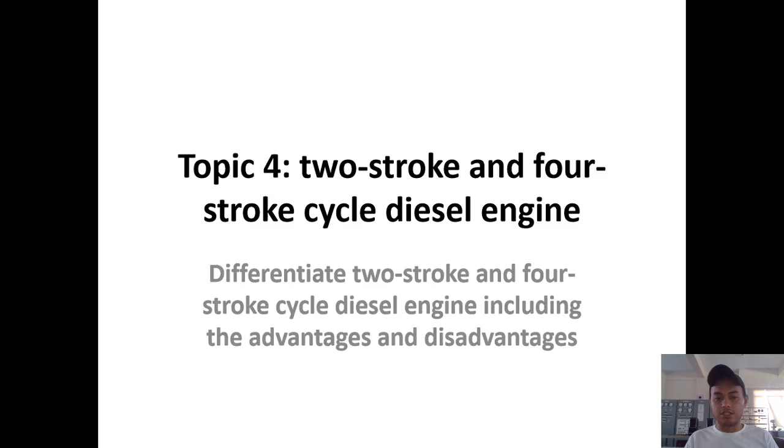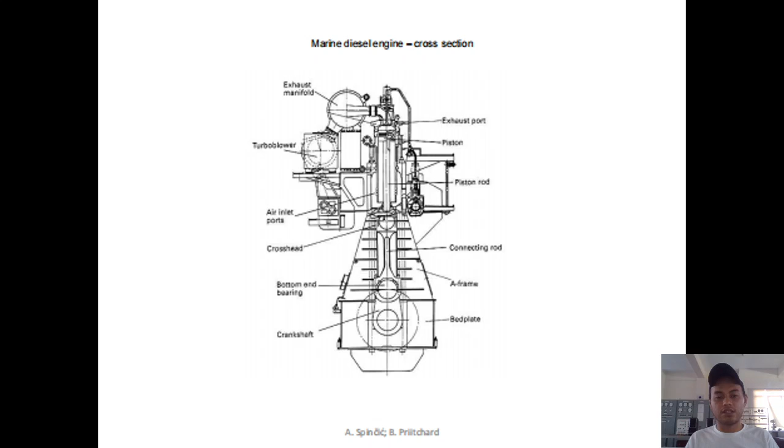Our topic will be all about the four-stroke diesel cycle, the two-stroke diesel cycle, the two-stroke crosshead engine, and the uniflow and loop scavenge engine. We will tackle all of these topics.

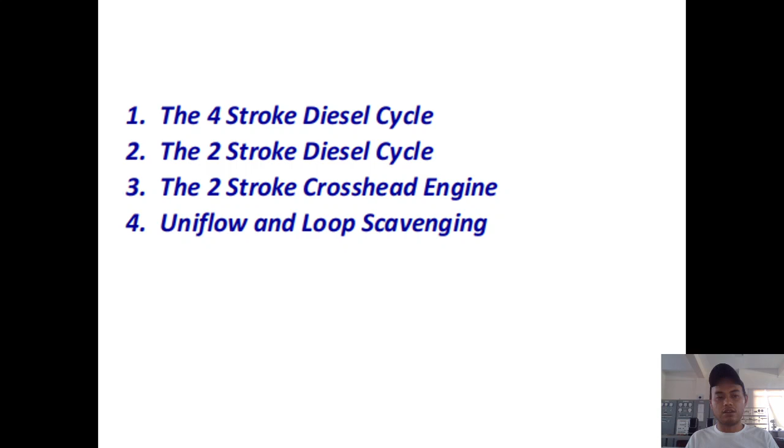Stroke 1 is induction or intake. Intake of air, so the air enters inside our combustion chamber. Inside the combustion chamber, we have a piston.

The crankshaft is rotating. As the crankshaft rotates clockwise, the piston is moving down the cylinder. The inlet valve is open, opening inside the combustion chamber of the cylinder.

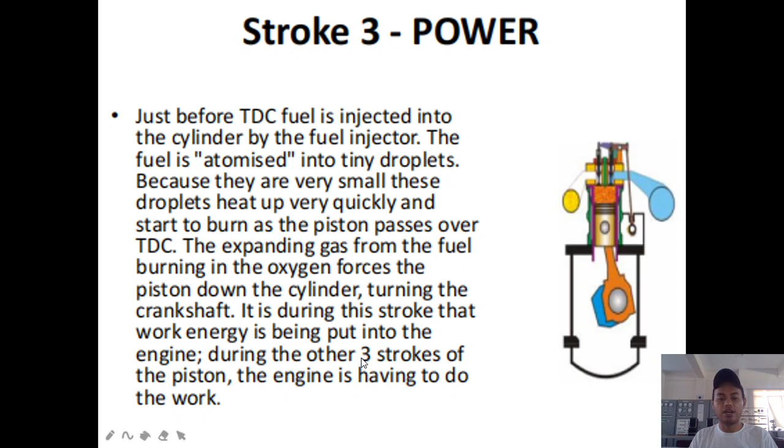So it is during this stroke that work energy is being put into the engine. During the other 3 strokes of the piston, the engine has to do the work. Okay, so that's stroke number 3, the power stroke.

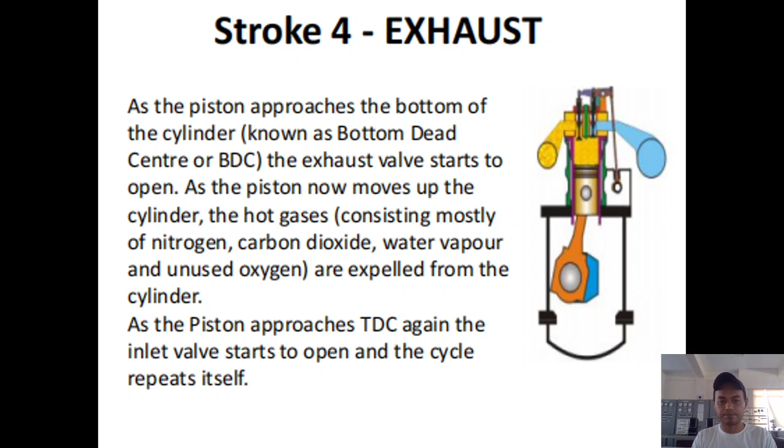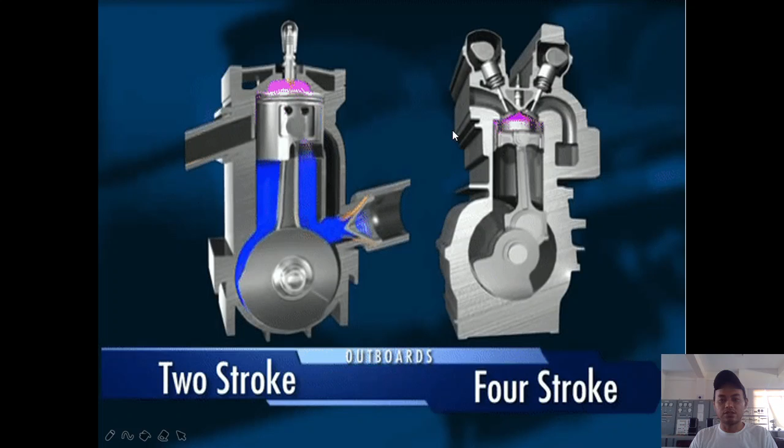In this video, actually the 4 events - intake, compression, power, and exhaust - yung 4 na events na yun, tawag doon na events, ay ginagamit sa 2-stroke, ginagamit din sa 4-stroke. As you can see in here, this is a typical, simple diagram lang. Hindi talaga ganito yung forma sa barko. This is a simple diagram para lang mas ma-clarify natin or mas simplify natin yung idea. As you can see, the blue color is the...

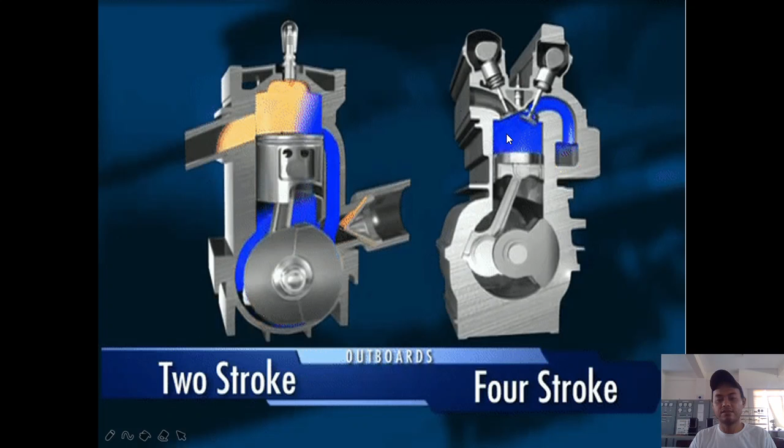Dito naman tayo sa 4-stroke, mag-start tayo. So yung blue color is papasok doon sa loob, so that is intake, and then aakyat yung piston, magiging violet, that is compression, and then magbibigay tayo ng fuel, magiging yellow, that is power, and then exhaust, ilalabas naman yung mga unwanted na gases. So that is the typical 4-stroke.

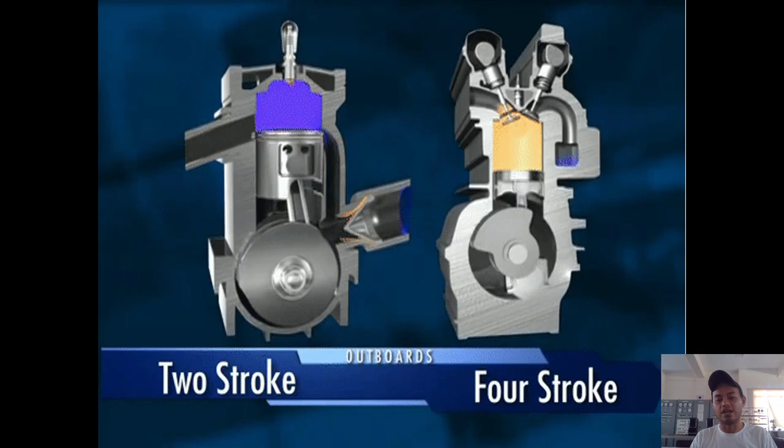Dalawang ikot yung nagagawa yung 4 events na intake, compression, power, exhaust. Habang naman 2-stroke, sa isang ikot niya lang, nagagawa niya yan lahat. Makita natin, sa pag-angat niya, nandun yung intake, compression - pag-angat pa lang yun - and then pagbaba ng piston, nandun naman yung power and exhaust. Yung 4 events na intake, compression, power, exhaust ay nagagawa ng 2-stroke sa isang revolution lamang. Habang sa 4-stroke naman, yung 4 events ay nagagawa niya sa 2 revolution. So that is the comparison lang ng 2-stroke and 4-stroke.

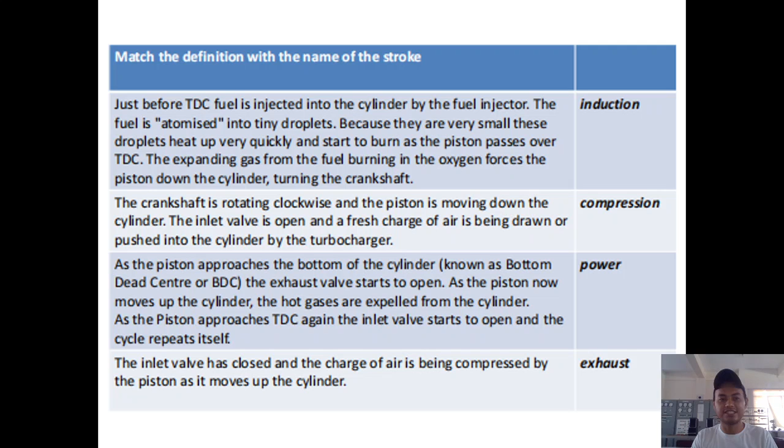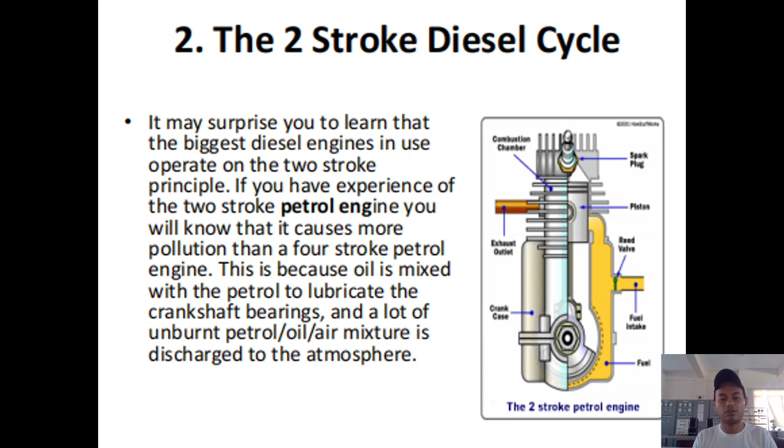Two-stroke diesel cycle. It may surprise you to learn that the biggest diesel engines in use operate on the two-stroke cycle principle. Akala ko ba mas maganda yung four-stroke, mas mabilis yung four-stroke, pero bakit yung malalaking mga engine, yung napakalaking mga engine, ay two-stroke yung ginamit nila na principle. If you have experience of two-stroke petrol engine, you will know that it causes more pollution than a four-stroke petrol engine. Yung nandito pala is petrol, but on board, diesel tayo. This is because oil is mixed with the petrol to lubricate the crankshaft bearings, and a lot of unburned petrol-oil-air mixture is discharged to the atmosphere.

So sa two-stroke diesel engine naman, walang mixing of fuel or oil with the combustion air. So the crankshaft bearings are lubricated from pressurized oil in the same way as a four-stroke engine. The two-stroke cycle is so called because it takes two strokes of the piston to complete the process needed to convert the energy in the fuel to work.

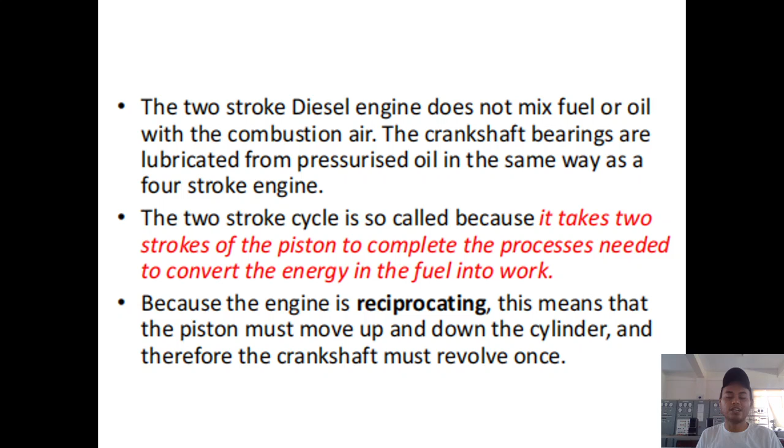So nakita natin ito kanina. You can screenshot na lang, you can download this video. So this was already discussed. So dito tayo sa stroke number 2 or the compression stroke. So just before top dead center, fuel is injected into the cylinder by the fuel injector.

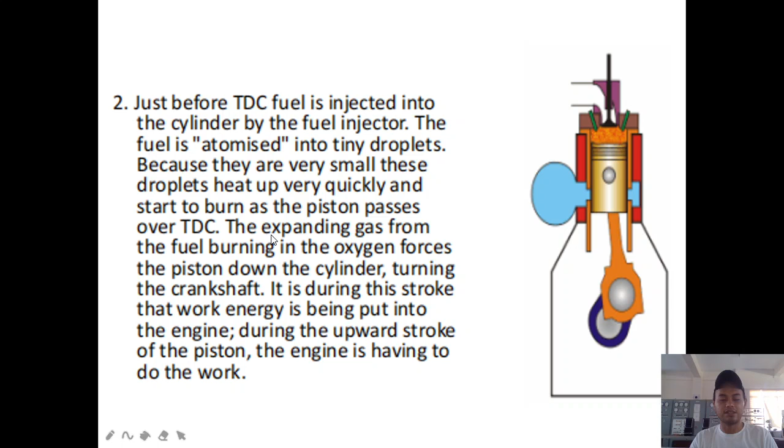So the fuel, ano ba to? Third stroke na to. So this is the power stroke. So because they are very small, these droplets heat up very quickly and start to burn as the piston passes over top dead center. So the expanding gas from the fuel burning in the oxygen forces the piston down. So alam niyo na to. So this is discussed already.

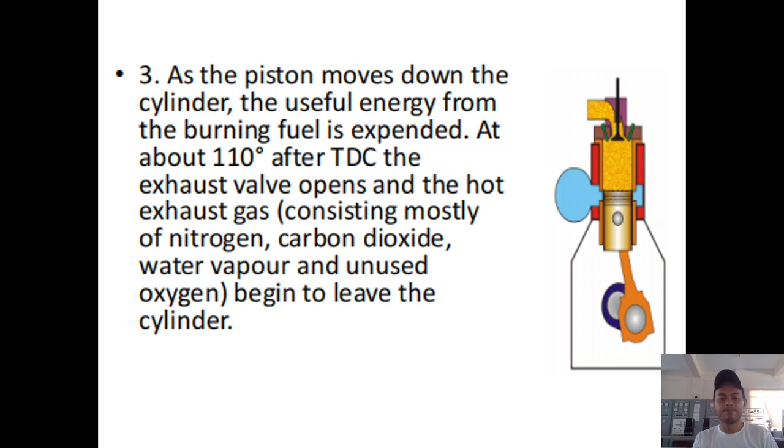So number 3, as the piston moves down the cylinder, the useful energy from the burning fuel is expended. So yung burning fuel natin, yung energy na ginamit niya pagtulak sa piston bababa is nawawala din sa katagalan. Kaya kailangan na natin, so at about 110 degrees after top dead center, the exhaust valve opens and the hot exhaust gas begins to leave the cylinder. So exhaust stroke na siya.

So at about 140 degrees after top dead center, the piston uncovers a set of ports known as scavenge ports. So makita natin dito sa two-stroke, wala siyang yung kanina na meron siyang intake valve at exhaust valve sa itaas. So yung nandito lang sa ating two-stroke is nasa baba yung kanyang intake port. So may mga butas yan. Diyan papasok yung hangin. And then sa taas naman yung exhaust niya.

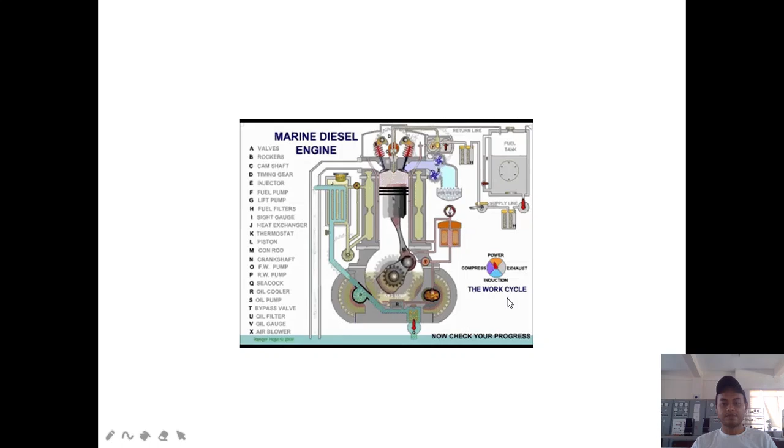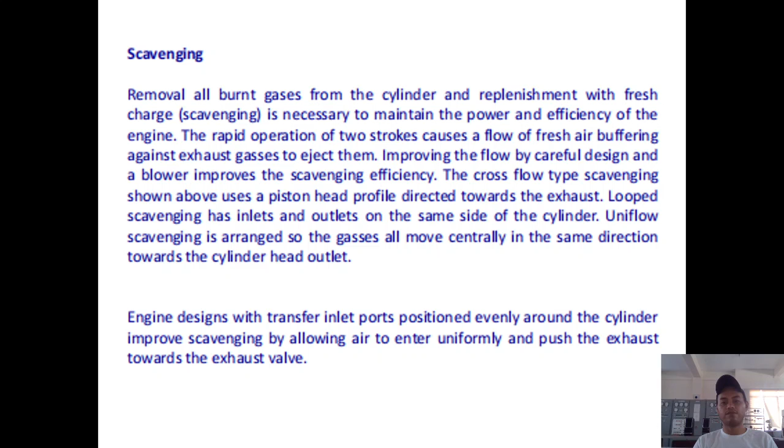So, scavenging is the removal of all burnt gases from the cylinder and replenishment with fresh charge is necessary to maintain the power and efficiency of the engine. The rapid operation of two-strokes causes a flow of fresh air buffering against exhaust gas to eject them, improving the flow by careful design and a blower which improves the scavenging efficiency.

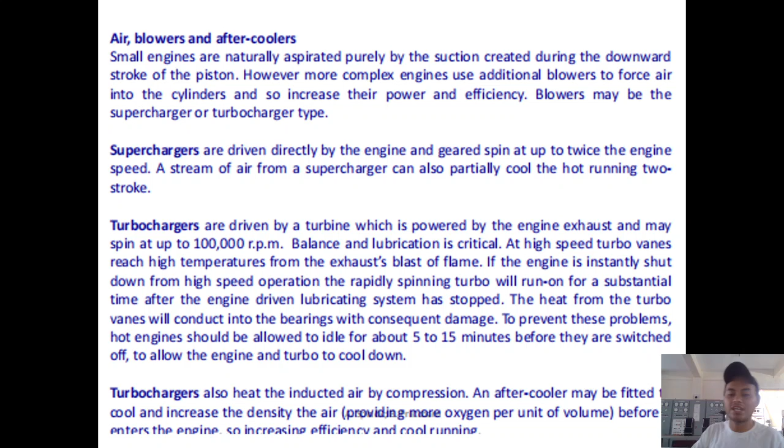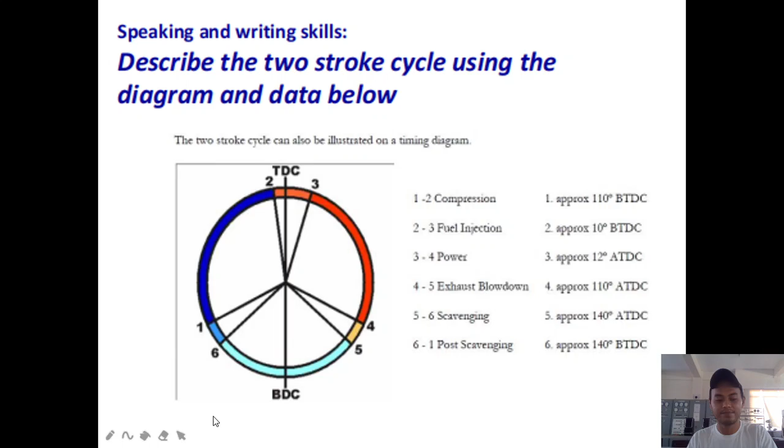So, on diesel engines, timing methods vary widely in different engine designs. So, kung nakita niyo kanina yung timing design ng two-stroke, hindi sa lahat ng barko is ganun yung timing na ginagamit. So, that is just an example. Diba? Yung timing, yung circle kanina. So, this timing diagram is just an example. Different manufacturers, different timing diagram. Okay?

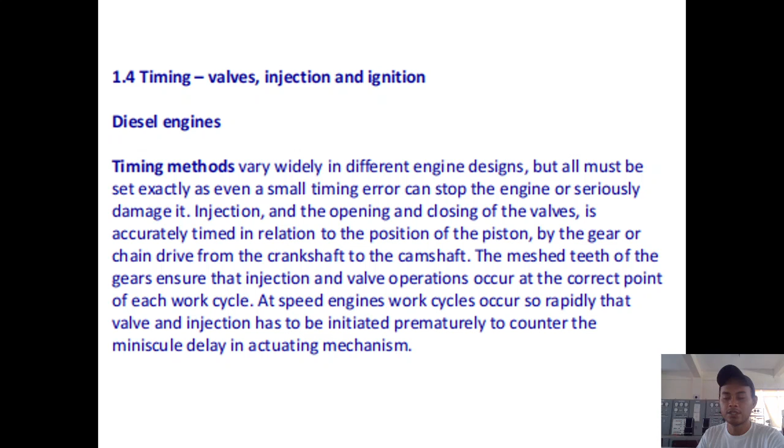So, the meshed teeth of the gears ensure that injection and valve operations occur at the correct point of each work cycle. At speed, engines' work cycles occur so rapidly that valve and injection has to be initiated prematurely to counter the minuscule delay in the actuating mechanism. So, may mga losses tayo. Meron tayong mga adjustments dyan. May mga clearance tayo.

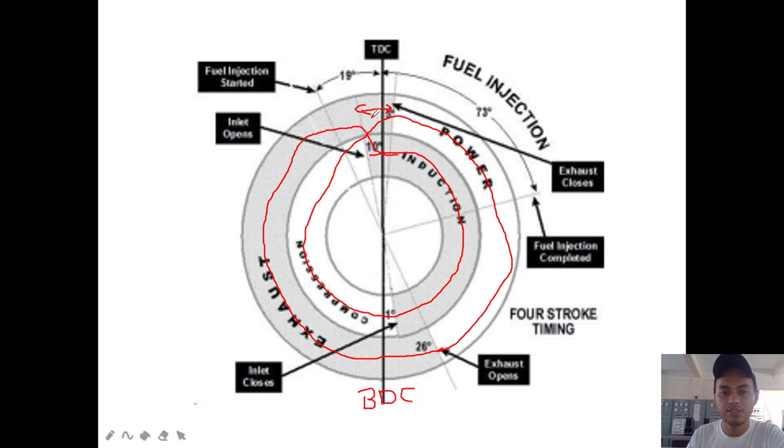Okay, so this is a typical 4-stroke. So, example lang to. Okay, so makikita natin meron ng dalawang ikot. Okay, the heat in the compressed air ignites the fuel and combustion takes place. The gas is expanding, forcing the piston down on the power stroke.

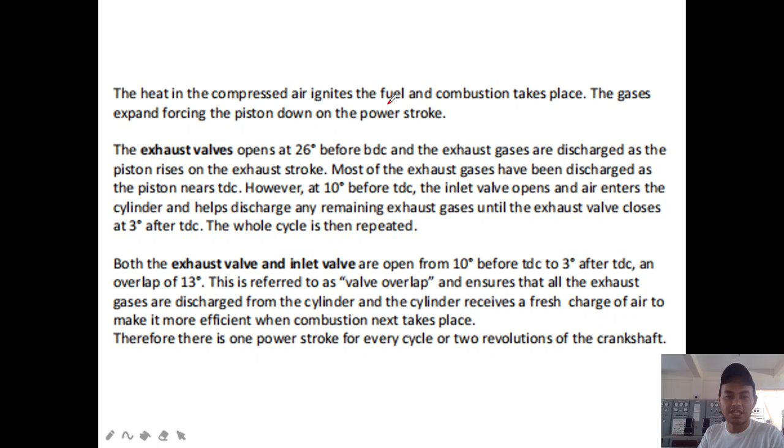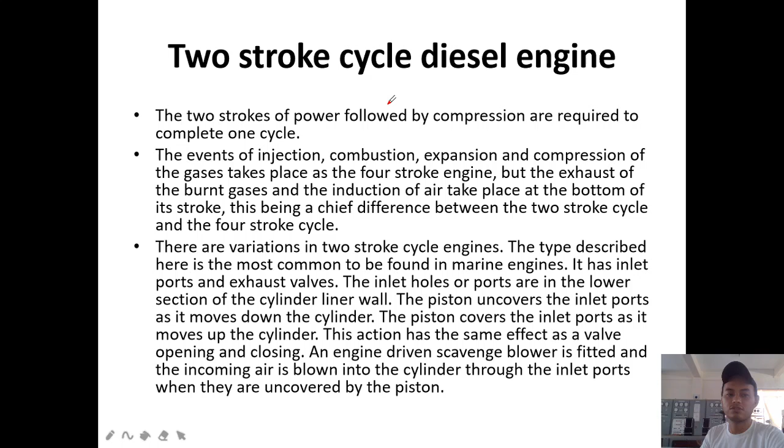Okay? So, the 2-stroke cycle diesel engine. 2 strokes of power followed by compression are required to complete 1 cycle. So, isang cycle lang, 4 events, dalawang stroke ng piston. Yun yung 2-stroke. So, yan, I hope clear na yan sa inyo.

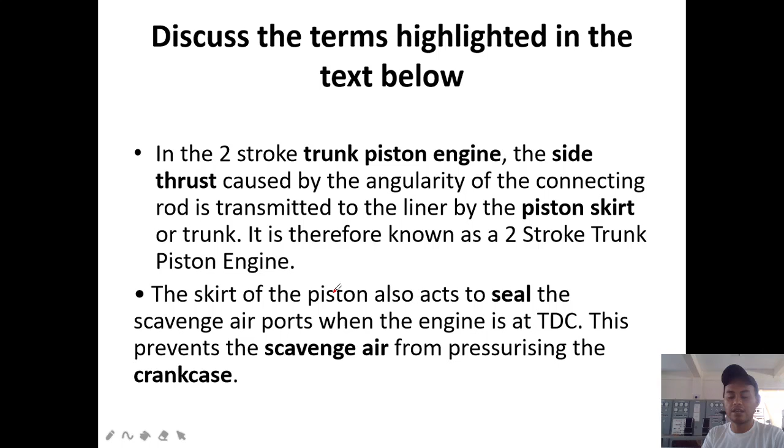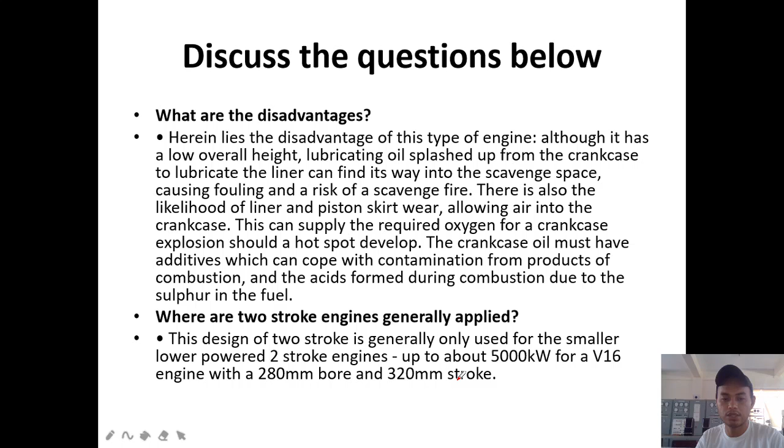The design of two-stroke is generally only used for the smaller, lower-powered two-stroke engines up to about 5,000 kilowatts for a V16 engine with a 280mm bore and 320mm stroke. Actually, sa ngayon may malaking mga engine two-stroke na rin yung gamit.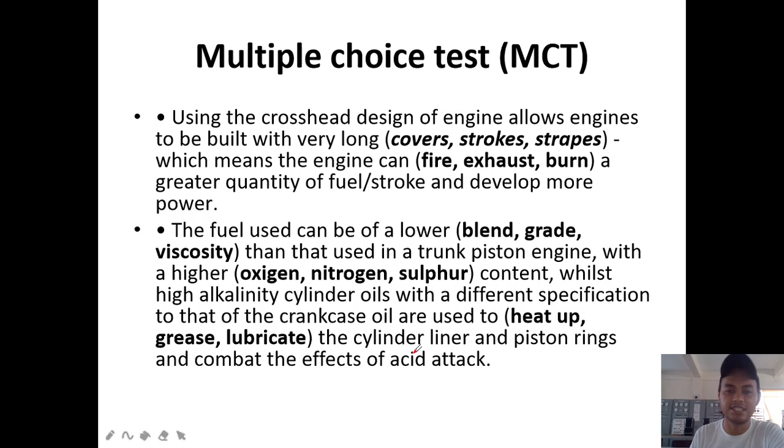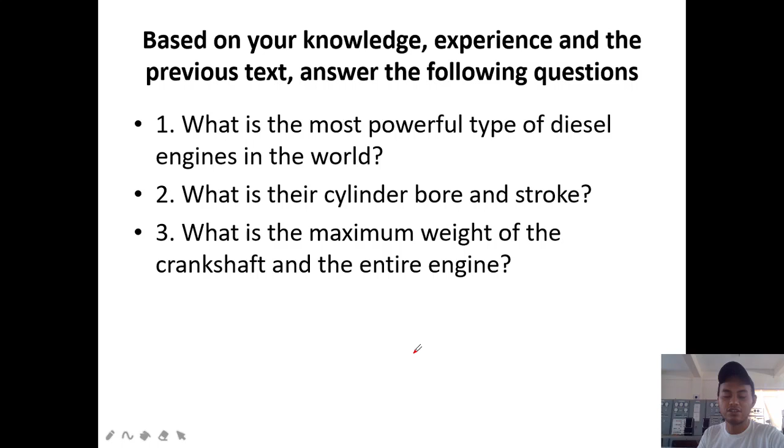For activity number 2, add these questions: What is the most powerful type of diesel engine in the world? What is their cylinder bore and stroke? What is the maximum weight of the crankshaft and the entire engine? Research on the internet for the highest or most powerful type of diesel engine you can find, and write that in activity number 2.

Using the crosshead, okay. And jumbled text type questions may also appear on our exam.

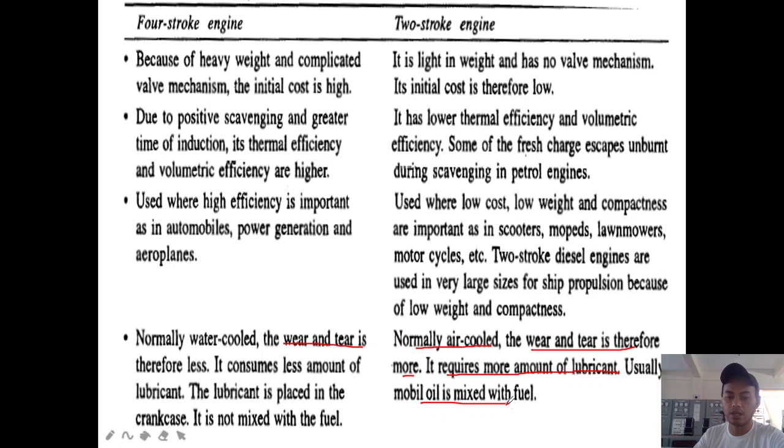Whereas the 2-stroke engine is air-cooled, so wear and tear is more, and it requires more amount of lubrication. Usually, mobil oil is mixed with the fuel in the 2-stroke. But in the 2-stroke, extra oil is also injected at the piston, so more oil is used overall in the 2-stroke.

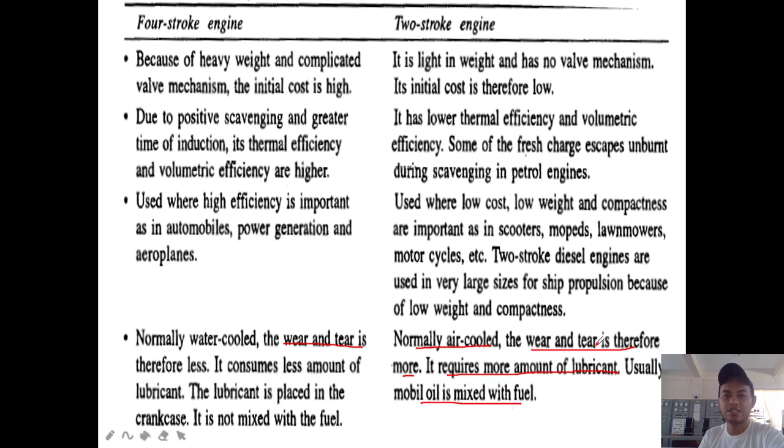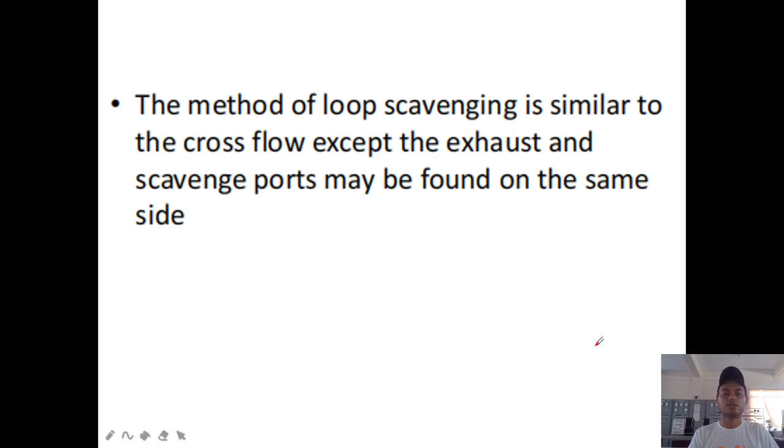For scavenging, we will discuss this separately - the uniflow, the cross scavenging, loop scavenging, and uniflow scavenging. These are used only in 2-stroke engines, not in 4-stroke. We'll discuss this in a separate video, a separate topic.

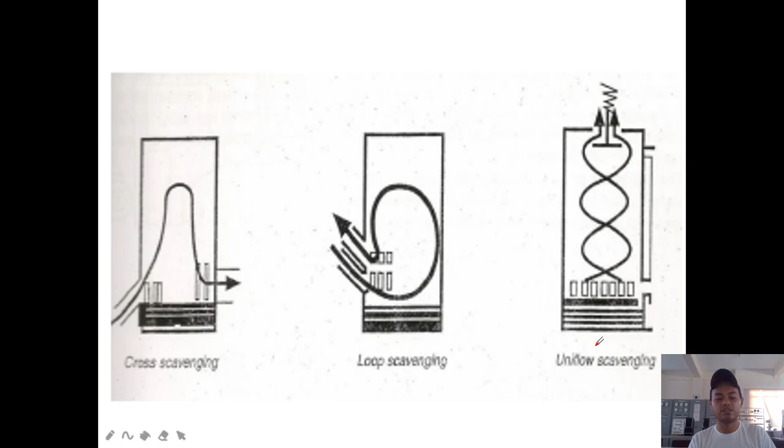That might be topic 8, or was it topic 7? We will discuss it.

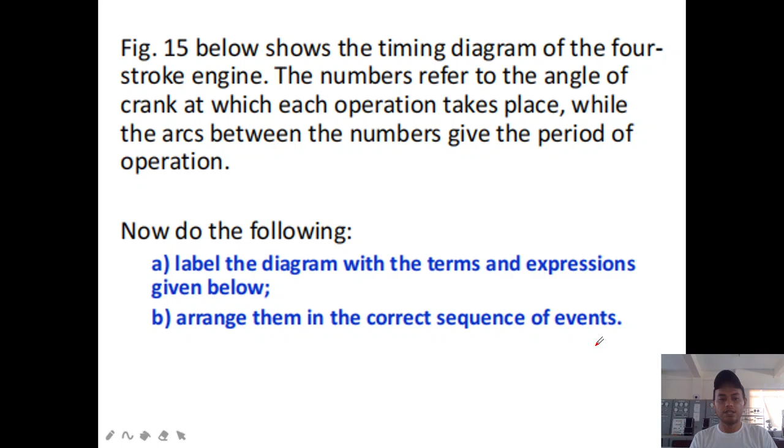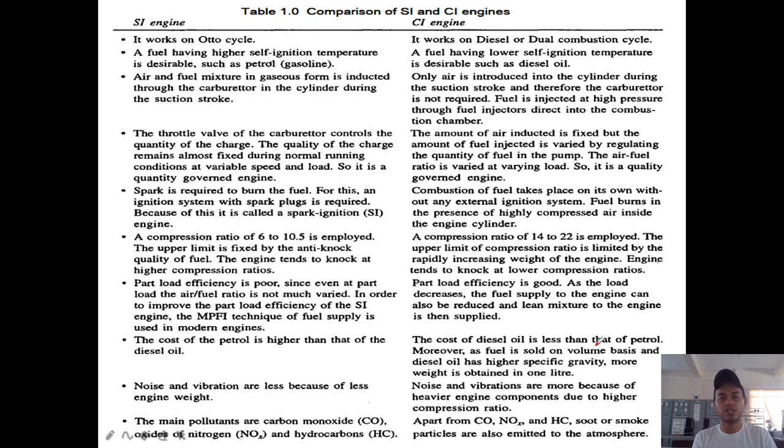Okay, so that's it. Comparison of SI (spark ignition) and CI (compression ignition) engine - this isn't included here since it was discussed in our previous topic, the gasoline and diesel engine. So we will not discuss this in this video, okay.